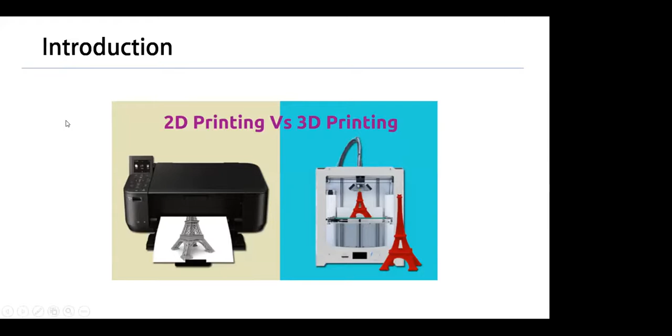So you might have heard about 2D printing. Normally we use printers for printing any paper or question paper. So what is it basically? It's a 2D paper on which ink gets printed. There are many printers, like laser jet printers and inkjet printers.

In a similar way, if we compare 3D printing, we are adding one more dimension, and that dimension is thickness. For example, if you take a single sheet, it will have length and width, but there is no thickness, only a very minute thickness. But if you stack about 100 pages, then you get one thickness. That is basically the third dimension we are talking about, and that is called 3D printing.

In a 2D printer, you can print just a picture of the Eiffel Tower, whereas with the help of a 3D printer, you can create a real 3D model of that Eiffel Tower.

So it's basically a layered process. Whatever the object might be, it will be split into different layers, and one by one the layers get deposited. In manufacturing terms, this is called additive manufacturing, because we are adding layer by layer to create the final geometry, and it is in contrast to conventional manufacturing.

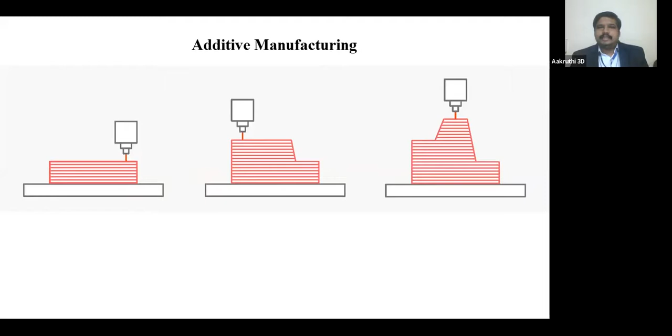There are many other names for this technology. In the 1990s, people used to call it automated fabrication. There's one popular book also by this name, AutoFab. What it means is we are using automation to fabricate things—that's why it was called automated fabrication, or AutoFab.

Then it was called freeform fabrication. Freeform means it is free of complexity, or the independence of the form—that is called freeform fabrication. Since it is mostly used for prototyping and reduces development time, it was also called rapid prototyping.

And stereolithography—this word was coined by Charles Hull. He is basically the inventor of this technology, and he invented it during 1986. He founded a company by the name 3D Systems, which was the first company to come up with this SLA 3D printing technology.

Lithography—you might have heard this term in the electronic semiconductor industry. It's a Greek word: litho means stone, and graphia means writing. So literally, lithography means writing on stone. Earlier, artists used to do this—if they wanted to make drawings on stone, they used this process. It's basically a chemical process.

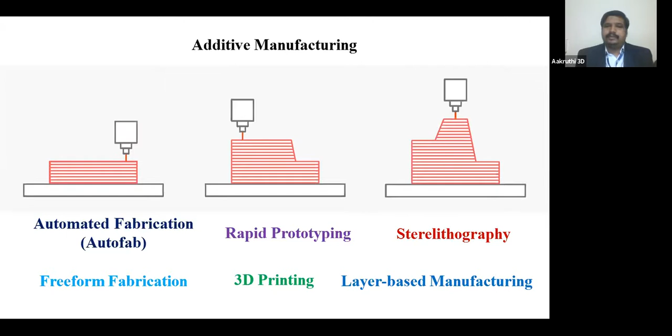Stereolithography is one process in which we use photopolymers, which we'll see in a short while. And as I told you, it's a layered process, so it can also be called layer-based manufacturing. The term 3D printing is the most popular word—researchers at MIT used to use this word because inkjet 3D printing technology was invented by researchers at MIT. They thought since we are just adding one dimension, this would be an appropriate term, and it makes sense as well. That's why this word became popular.

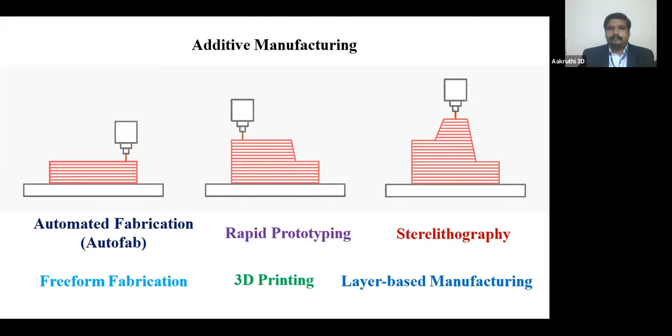Now coming to how the technology works—these are the brief steps. Everything starts with an idea. If you want to build something, you have an idea, then you convert it into a digital design. Since most of you are engineering students, you might be aware of CAD tools like CATIA and SolidWorks. You use that CAD tool to create the digital design of your product, and then feed it into the machine. But you cannot feed the direct CAD file to the machine, because as I told you, it's a layered process.

We need to convert whatever design you have into various layers. That process is called slicing. We have many open source slicing softwares, and there are proprietary softwares also, where the main objective is to convert your digital design into this layered format.

Then that will be converted into one more file format called STL, or stereolithography format, that can be readable by a 3D printer. You might know what language a computer understands - it's binary language. Similarly, a 3D printer understands a language known as G code or geometric code. So what this slicing software does is convert your STL files into G codes.

Then you feed whatever material you need. That material will actually be deposited in layers to create the final object. You can remove that object by hand, or there are some systems which have automated this process. Then we can do basic post-processing techniques to obtain whatever qualities you want, like maximum surface finish or strength. All these qualities we can bring to the model using post-processing techniques.

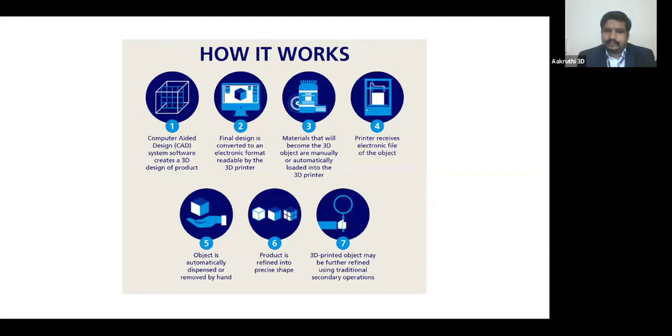But with 3D printing, all these complexities - it is free of that.

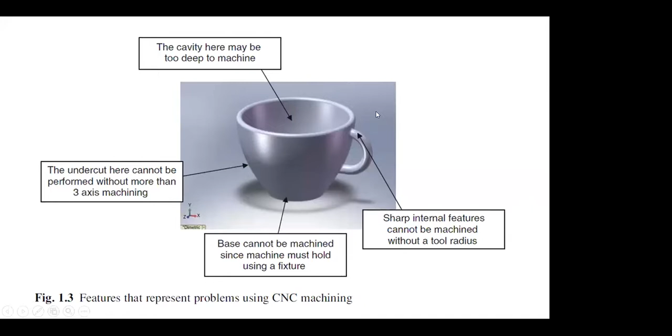Coming to the plastic regime, there are 2 major technologies: one is FDM or fused deposition modeling, and the next one is SLA or stereolithography 3D printing. So today in our webinar, we're going to focus on these 2 technologies - we'll compare FDM and SLA 3D printing.

Nowadays 3D printing is being applied to all fields. Recently, you might have seen Nirmala Sitharaman inaugurating India's first 3D printed house. Before that, even L&T ventured into a similar adventure - that is construction 3D printing. Similarly, 3D bioprinting is there, where you can use live cells and tissues to make human organs.

And there is wax you can print. Metal is actually the revolutionary part, where it is starting to be the next industrial revolution. Industry 4.0 is coming - we are already on the verge of it, where additive manufacturing will play a major driving force for it.

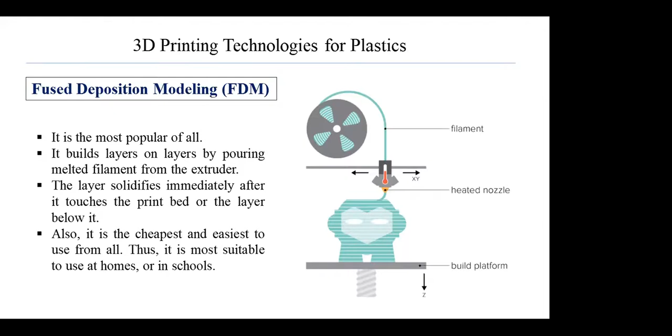But it has its disadvantages, like you might not obtain the surface finish as you require, and the materials are limited, so it cannot be used for all applications. Only for the initial proof of concepts or prototyping can you use this technology. And there are many commercial brands available for FDM 3D printers.

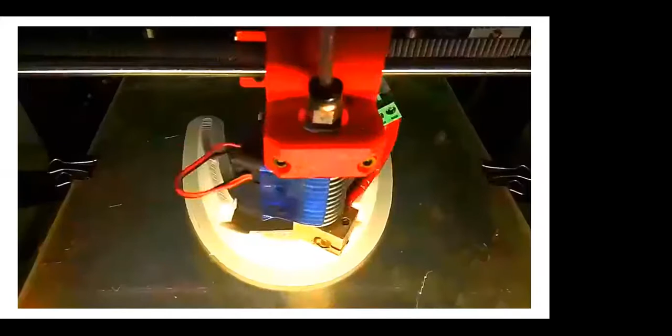So here you can see there is a pattern in that model. That is called infill. Normally using conventional manufacturing, either you can create complete solid models or hollow models. But this is one aspect of 3D printing which is a great differentiator: you can make semi-solids, that is, inside the material you can give some patterns so that whatever strength you require, it will be there.

But at the same time, it will reduce the weight. So this type of application, like in aerospace, will play a very predominant role, where weight reduction is important, but your strength should remain the same.

Then coming to the core of today's focus, that is SLA, or stereolithography process. As earlier I was explaining, FDM is a mechanical process using thermoplastic materials with a heating component. But SLA, in contrast to that, is a chemical process.

So it comes under a classification called VAT photopolymerization, or it is commonly known as resin 3D printing. In this, there will be a photopolymer or a resin that, when it comes into contact with the laser light or a certain wavelength of light, will react to form a hardened plastic. So it is called curing basically. The laser cures photopolymer resin in this technology.

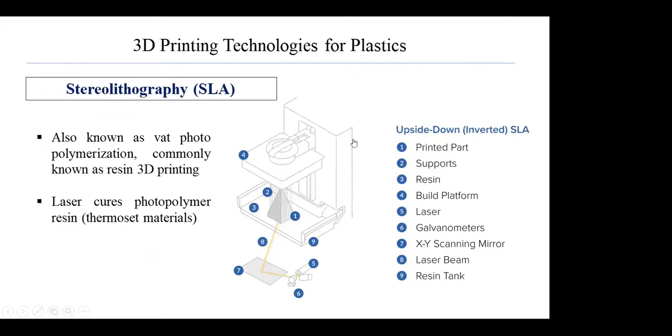In this process, the build platform as well as the part first lowers into the liquid resin.

This process goes on repeating layer by layer. The build platform lifts out of the liquid resin, then lowers down again. Like this, layer by layer, it happens. Through this, the heavy forces are reduced, and we can obtain better prints and better surface finish using this technology.

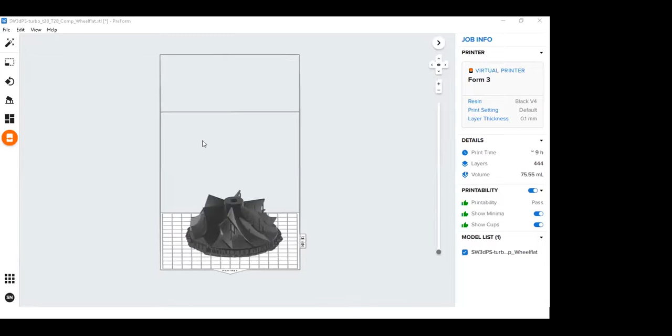So this is the software, it is PreForm. The first thing is you need to load your models, and the preferable file format is STL or OBJ. Here you can see the impeller - I'm just using it for demonstration purposes.

On the left side, you can see some options. The first thing is size, so you can scale this component - you can increase or decrease the size according to your requirement. And you can generate supports using this.

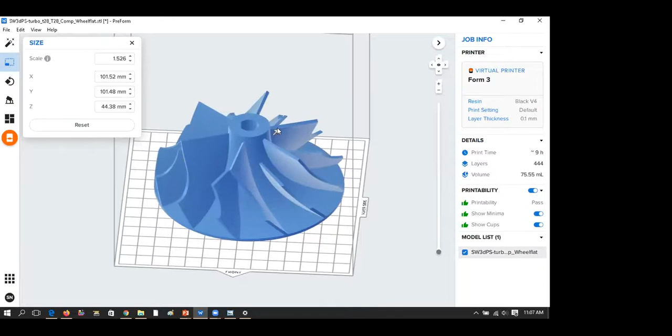So you have to select this component. Here you can see I've used a scaling factor of 1.5, or you can directly drag and drop so that component becomes whatever factor you want, you can make that size.

On the right side, the main important parameters you can see - what is the resin we are using. Currently it's the black V4 resin, and the default print settings are set, with layer thickness at 0.1 mm, that is 100 micron layer thickness.

Here you can see the print time taken for the model, how many layers it's going to print, and what is the volume of resin it's going to consume - it is 80 ml resin it is consuming. And for printability, you can see here it is giving a warning.

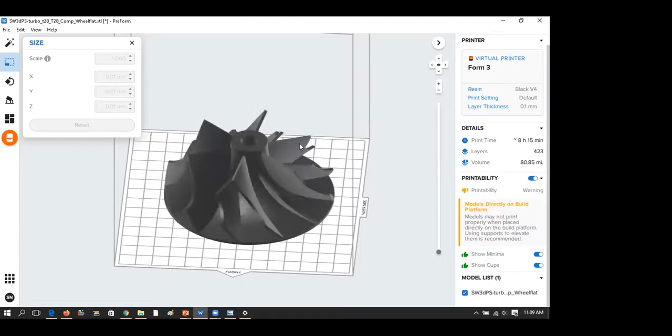The model is directly placed on the build platform, so we cannot print it like this as it is, because as you can see the blade profile, we actually need support structures here. So let me show how to generate support structures.

Again, you have to select the model before applying any setting. Then on the left side, you can see the second icon, that is for orientation - if you want to change the print orientation, you can do that. The third one is for supports.

There are different types of supports. Basically, where you want to generate a support is very important, because here your blade profile is important - there you need very high surface finish, that's the place you don't want support. But there is an auto generate option also - let me just give it and see.

So these are basically supports, extra materials where there is overhanging, support structures will be generated that we'll have to remove in post-processing stage. Our main aim is to get printability pass. On the right hand side, you can see it is still in warning. Once we get the printability pass, then only can we go ahead for the print.

Right now I'm using a virtual printer. You can directly connect through USB to your real printer, or there is one more option called remote printing, where right now our machine is in Bangalore and I am sitting in Shimoga. So I can take control of the machine, give print from here itself, and monitor its progress - what is happening, whether the print is going as scheduled or not. Those parameters I can monitor, or if I want to stop it, I can do that. So that option is also available in this machine.

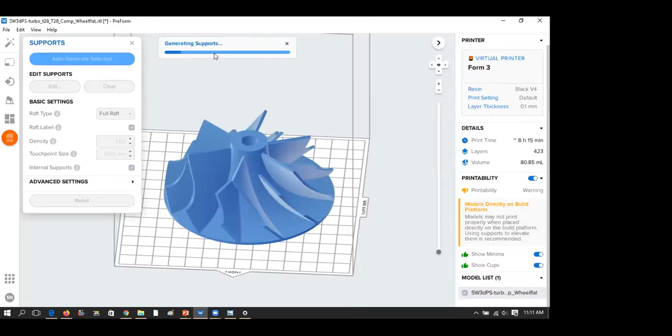So you can see the supports it is generating right now. This is going to take some time. In that meantime, we'll try to see the printer properties.

Supports are generated, you can see here. The main difference is here you can see it is not continuous support - there are spikes like structures. And it is very easy to remove these structures, just manually we can remove it.

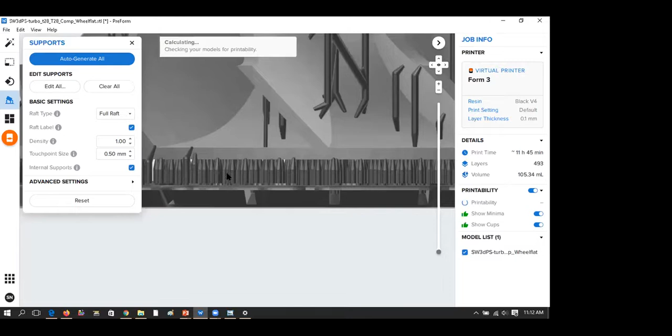And here you can see the raft type given is full raft, that is for the entire model. There will be a support structure generated, its density, and touch point size. Touch point size is each of these spikes actually - it will be in contact with the model. So what is that size? That is 0.5 mm.

And now you can see on the right side, the printability is pass. Just look over the entire model, how it is generated.

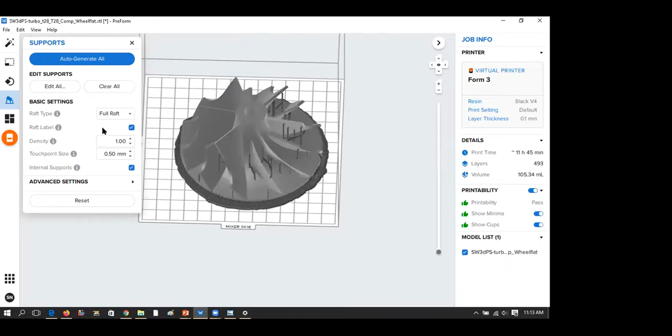But here actually, you can see it has generated support. So this we don't want. So what we can do is, there is one more option - you can change this orientation so that we can avoid supports at these structures.

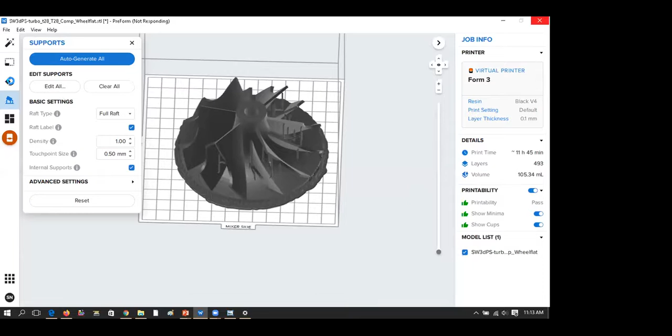This software's minimum RAM supported is 4 GB and above, so the recommended RAM is actually 8 GB - that's why it is hanging, you can see here. Otherwise, we can change the orientation of this model so that wherever the blade surface is there, we can avoid those support structures.

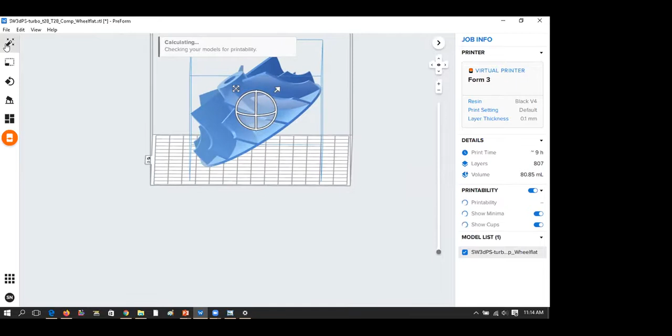We can use this orientation, or there is one more option called one-click print, where the system itself will automatically orient so that it will avoid these supports at those specific places. Let's see - this is the best orientation calculated by the software, and here it will generate the support.

Our main focus is on the blades. For the base, however much support is there, we can do post-processing to make a smooth surface finish.

So this is how you do print preparation using PreForm. Once that model is ready and printability is passed, you can directly upload the job to your machine, which will have a default memory of up to 64 GB. So you can directly send this model to the machine and it will start printing. Right now it is taking some time to generate support.

In that meantime, we'll go to Lohith. He can give a demo of how the machine looks like, and you can see in real how the resin tank looks, how the build platform will be there. Then we'll come back to the same location and see how the supports have been generated.

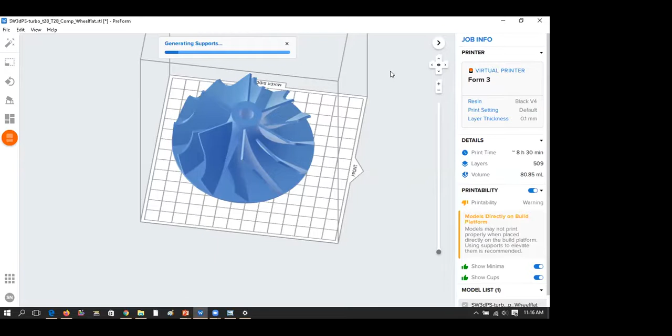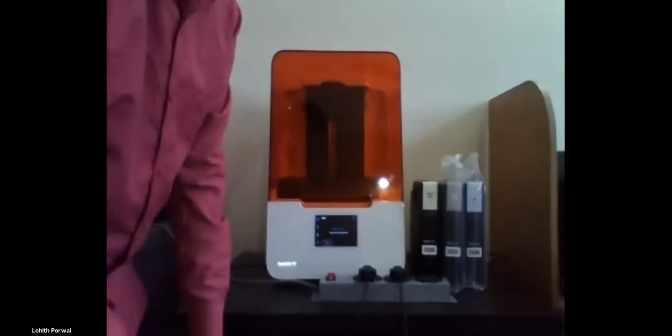Lohith? Yes, Raghavendra. Shall we start? Yeah. Is my screen visible? Yeah.

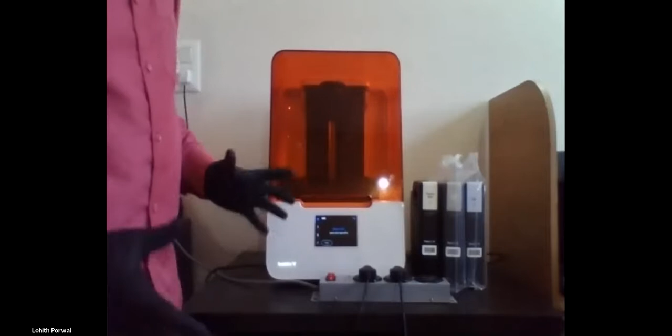This is the machine which has a covering protecting it from UV light as well as sun rays to avoid solidification of the liquid resin. This is the touch screen display where we can set our conditions. The first one is the home condition where our machine is ready to print, so it's asking the user to upload a job where we can see how the job is going to look like.

Previously we had uploaded many jobs on this particular machine, so the data is stored in the queue option. If I do a touch screen, I can see there are many different jobs available to us, and whichever part I want, I can reprint it without even asking the sender to send the model again.

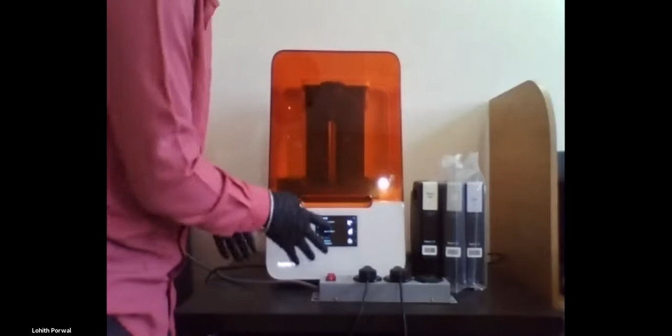So I can reconnect and reprint it to avoid those type of issues, especially due to unavailability of the user, since we already have the data stored here. I'll be selecting the same impeller model which Raghavendra was showing you. I'll click on this particular impeller, and now we can see approximately the same information being displayed over here as Mr. Raghavendra was saying.

The printing time is going to be 6 hours and 7 minutes. The material information is given, like which resin we are going to use, how many layers are going to get printed, and who was the creator of this particular model. So that information is available, and if we click on print, the machine will start printing, which I'll show in a few minutes.

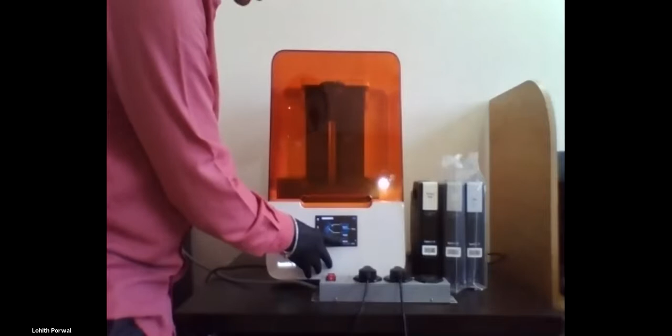After that, we have different notifications to see if our machine is working right or not. For example, we can check if the resin tank is placed, and if it is placed, what is the material in it or which liquid resin we are using. That information is given by the display screen.

After that we have a base plate, which is the print plate. If the print plate is placed in position, it will give a correct symbol. If it is not, it will give an error message, which I'll show how we can rectify.

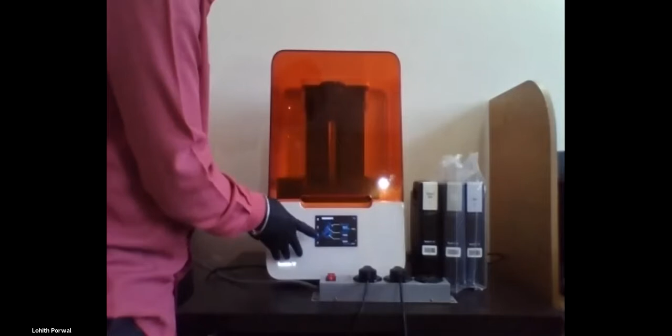Then we have a cartridge over here, and you can see there are 3 different cartridges available. These are the resin containers where resins are kept. We have elastic tough resin as well as clear resin. Currently we have 3 displayed here, and 1 more resin is placed at the back side, which I'll show.

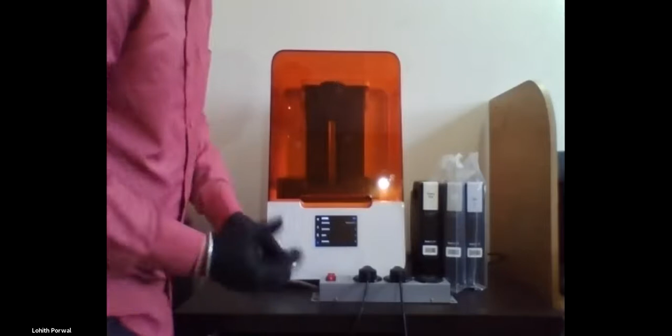As Mr. Raghavendra was telling, it has Wi-Fi connectivity so you can use this system from a remote place also. We have the connectivity information, the IP address of the system, and different issues, troubleshooting, and maintenance information all pop up on the system.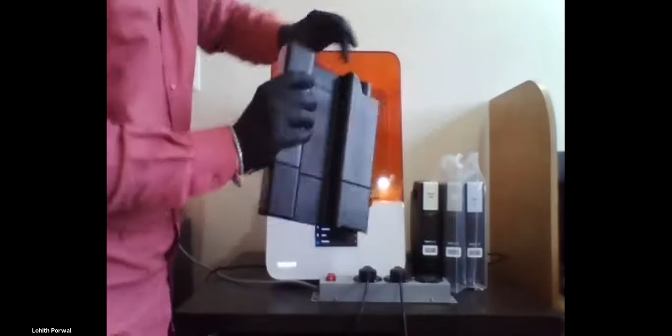So coming to the parts of this particular machine, first I'll show you the resin cartridge. I am removing this particular cartridge from the back portion. Here we can see it is named clear resin, with an information code and different details given regarding this component. I'll be inserting this resin back at the back portion like this.

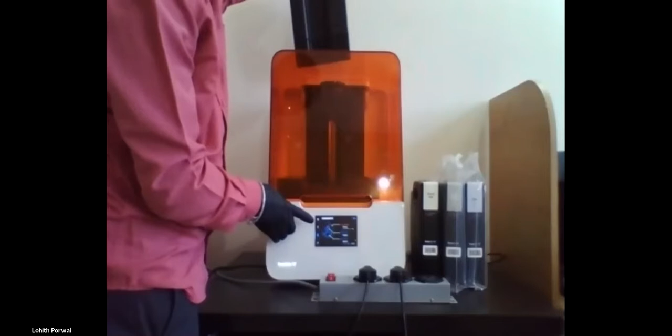To check if the resin is inserted correctly, you can see there is a red color being displayed, indicating the resin cartridge is missing. Once I place this particular resin cartridge, it turns blue, which means the resin is inserted and functioning right.

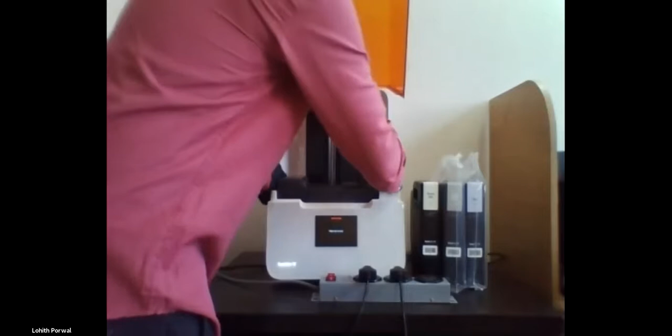Next, after inserting this cartridge, I'll open this particular container or shield. Now here we have this resin tank, which I'll be removing for display. It's a bit visible, can you all see the liquid resin inside this? Is it visible?

Yes. Can anybody confirm me? Yes sir, yes sir, visible sir. Yeah, you can see. And this is the main USP when compared to other machines.

We have a flexible resin tank here, where the base is not fixed, it is a flexible one. That is what is different in LFS compared to normal SLA technology. Yes, Lohith, you can continue.

After removing the resin tank, we'll again be inserting it back. Once the lid is open, we can see an error message on the screen saying the cover is open. To avoid that, we'll insert this properly, and the information says the resin tank is stored. When I close it, everything turns blue in color.

That means the resin tank is also inserted properly. There is no error in the resin tank insertion.

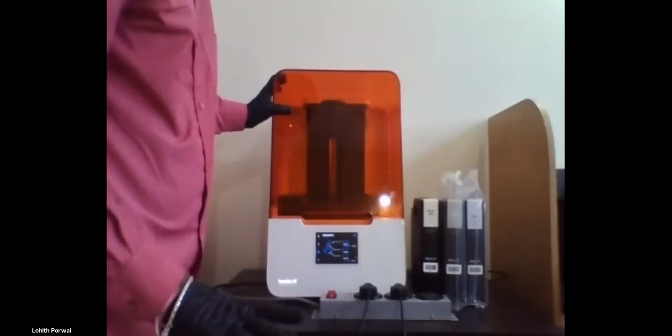After this is called the build platform, which I'll be removing now. I'll slide this down, and we have this component called the build platform. Whatever component or CAD is loaded will be placed over here.

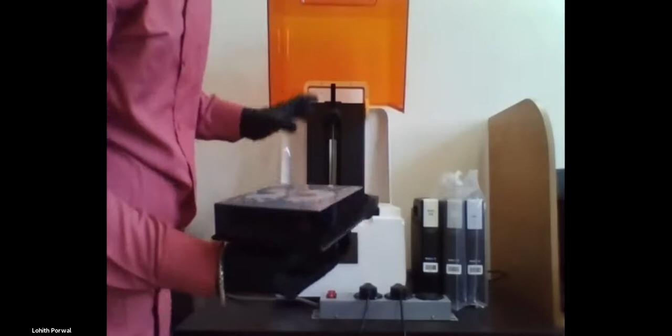For example, I have a few ready CADs which we have printed. The same impeller model is ready with us. We kept this model on the build platform, then did the post processing, and then removed this component.

I'll show what different components we printed. This is the build platform, and on this the resin is going to be impinging, meaning the low force is going to act. This rod is going to move up and down to move the build platform, and the laser is used to solidify that resin.

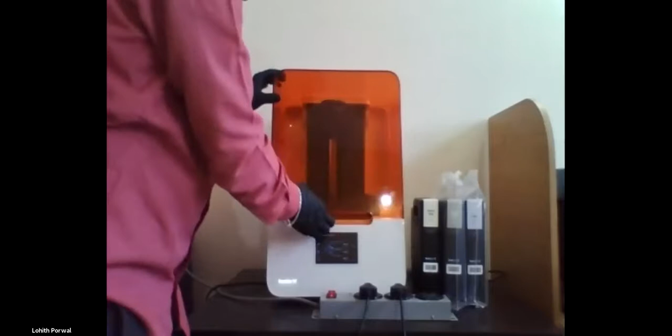I'll reinsert this build platform over here. After reinserting, we have this knob which I'll press down so that it is in proper position and locked, so it does not move. After that, I'll close this tank and check that the platform is correctly fixed or not.

Now I'll go to the machine and click on the impeller model. After this, everything is checked. We also need to check that the container, the box container, that is the cartridge, should first be opened one time.

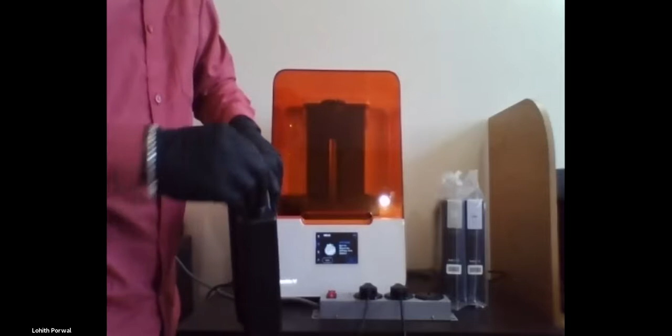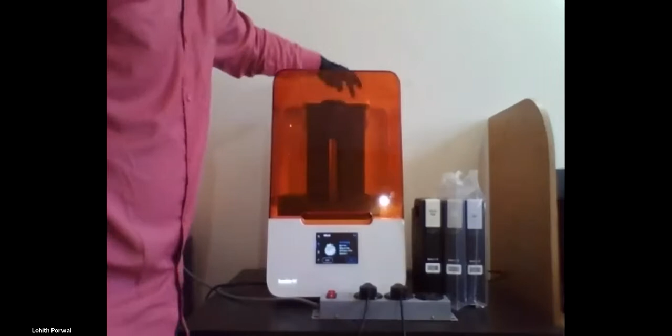It should be exposed to a bit of air, where the air passing will not create blocking of the flow of the resin. So we need to open the resin by opening the cap of the cartridge, and then make sure that all the steps we have followed are right.

After that, we'll click on this print option. When I do that, it gives a step-by-step procedure. It tells me to open the vent cap, which is of the cartridge, and make sure it's placed correctly. After that I click on next.

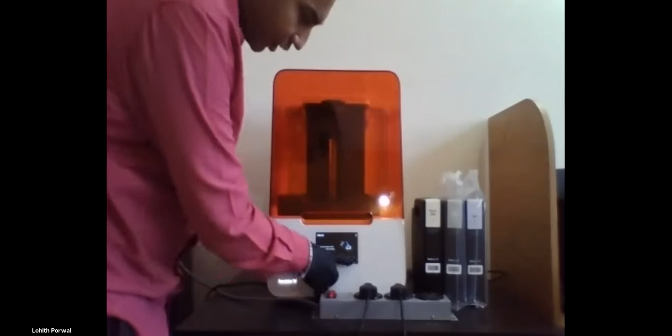Next, it tells that the build platform is locked; if it's not locked, please lock it before printing starts. So it's giving step-by-step instructions which I have already followed. Once I click confirm, it shows preparing print and is checking the optics.

There are 5 different steps which it is going to follow. The first step is optics. The second one is preparing the printer to check the resin.

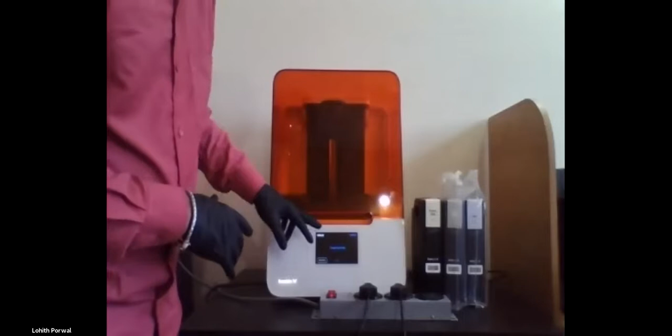Inside the resin tank, there is a movable film which moves to see how much resin is there. Based on the amount of resin present in the tank, resin is poured from the machine, and the liquid comes into the system and fills the resin tank needed for printing.

Now you can see it shows filling tank with clear resin. It's actually filling the resin tank, and I can see thin layers of resin flowing into the system and getting collected.

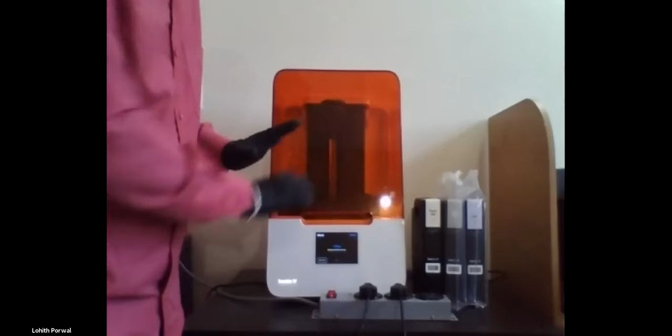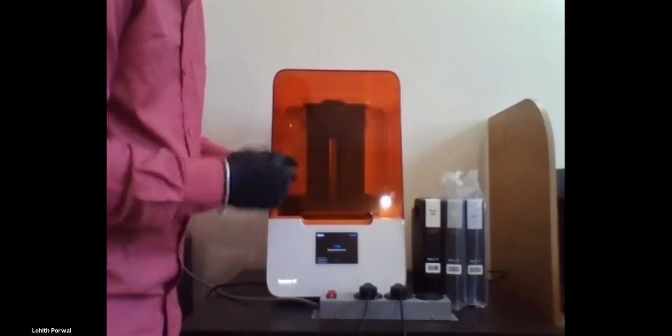Once this step is completed, it will check all the other settings to see that everything is right. Then it will show the printing status, talk about the time it will take, show a green mark or a circular pattern indicating how much time remains, how many layers have been printed, how many are pending, and the estimated completion time. All this information is shown on the display.

Now we have different materials as told, elastic, which is usually used for applications related to biomedical. For example, we have completed 3 different products which I am showing you today.

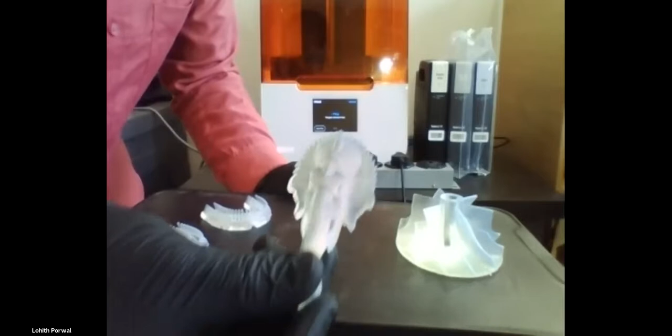Before that, we have this Ganesha model prepared to see how the complex features have been captured by the machine, and how much detailing is done on this part can also be visualized. After that, these are the strong materials.

So if I press like this, it's not going to bend. I'm pressing and it's not bending. This is from the tough material, because it's strong enough. So based on the application, we select the material.

But when you come to this particular model we've printed, it's related to an automatic brush system we are developing. If I press it, you can see how flexible the material is. It's mainly used in the bio industry or biomedicals, where the strength and features need to be captured.

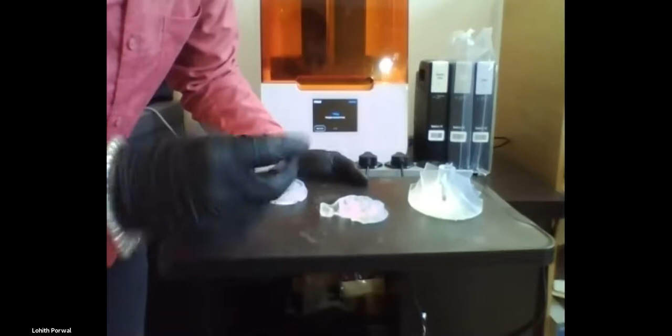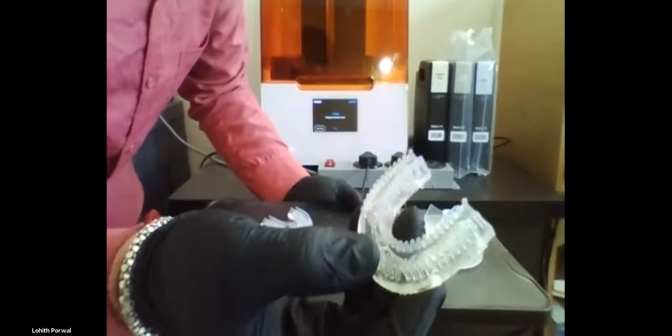So you can see we have two brush-type features over here, like bristles. If I press the bristles, it's going to bend. That shows how much detailing has been captured and what different features can be implemented, based on the design and the printing capability our machine is capable of.

So currently we are seeing that it's filling the tank. We'll have to wait for some time till the process starts, so I can show what the process is and how it's going to start the machine.

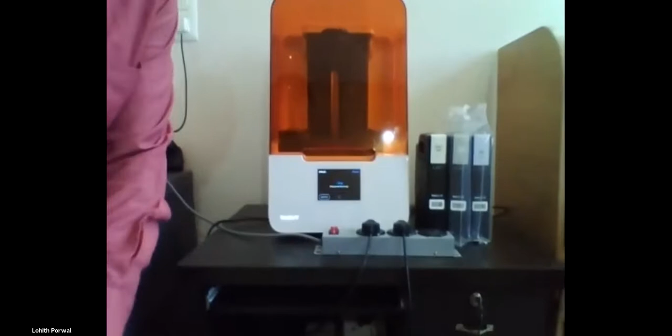Yes, thank you, Lohith. So let it print actually, it will take some time for printing. Meanwhile, let's see what has happened to our support, and then we'll look at some post-processing operations. Lohith, you can prepare for demonstrating post-processing in the meanwhile, and then we'll go back to the post-processing demo. I'll just share my screen.

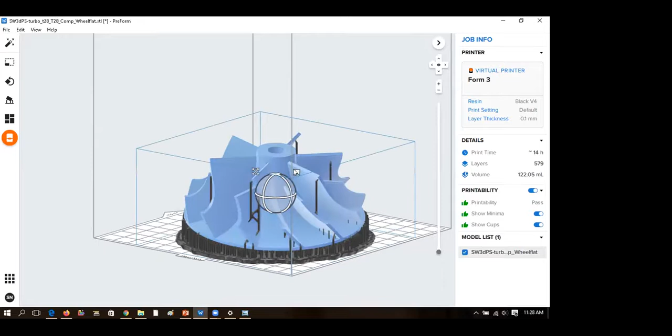So now here you can see the machine and the orientation it gave. Now there are very minimum supports. I agree there are some supports where this blade structure is, but compared to the previous one, it is better now. There's just one spike, you can see, that's all, and even that we can remove manually. So this is the best orientation according to the machine.

Once this is done, then we can give the print. You can see in the left hand corner there's an orange button, that's the start print. If I press that, and if connection is there with the printer, the printing will start. Otherwise, through remote printing, there's a dedicated account, and through that we can give the print.

So now we'll go back to our presentation. This is how we use PreForm, and then you give the printing. Once printing is done, we'll have to do a basic post-processing operation. In SLA, these two are mandatory processes: washing and curing. For these two, Formlabs has made it very easy with two machines.

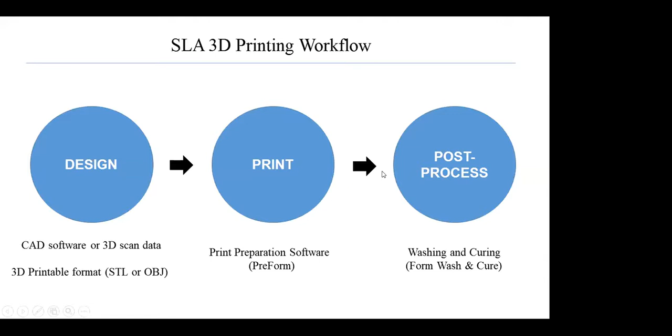Basically you can call these form wash and form cure. With the help of this, we can easily do the post processing. So what is the post processing? Here you can see on the left side, these two I was talking about: one is form wash and the other is form cure.

Once the print is completed, your parts need to be rinsed in isopropyl alcohol solution. Why is this done? The process, as I already explained, is photopolymerization - the laser cures the resin. But there will be some resin that is not cured, maybe due to geometric complexity or due to supports. There will be some uncured resin, so to remove this uncured resin from the surface, we use IPA solution and rinse the components after printing.

Once this is done, then we want to do post curing. What is this post curing? It's basically a heat treatment process where, based on different materials, we give the suitable temperature and time for post curing, so that you get the required strength for the component.

Once these two processes are done, we can finally remove the supports, and all other operations can be done, like sanding, machining, painting, buffing. So all these different post-processing techniques are there, and can be done on this part. SLA parts can be easily machined, primed, painted, and assembled for specific applications or finishes. So this is the post-processing aspect of it.

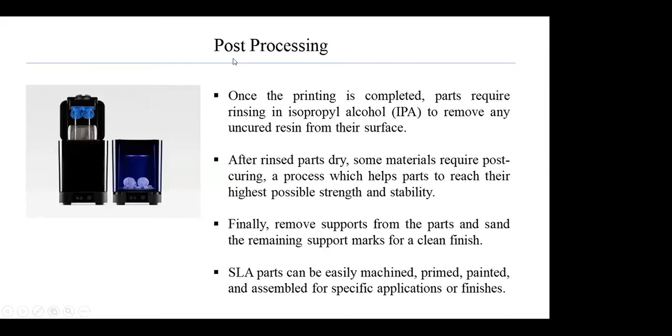Now let's have the demo of this post-processing. Lohith, go ahead. Yes sir, I'm just switching on my video. Is my screen visible? Yes.

Here on the build plate, we have this component which is already printed. We'll be using this washing container to wash the component using isopropyl alcohol, and we'll be using this heat treatment process to give strength to the component. We have different tools here which we'll be using.

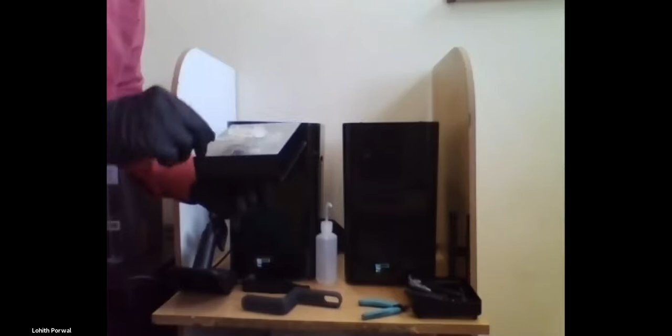The first one is the picker tool, which we'll use to lift this part. For example, since there are no supports, which I've already placed here, I'll be using this component by hand and placing it in this system.

After that, we have different tools, but sometimes the parts are so complex that we cannot hold the build platform in hand and use it. So we have this stand, given by Formlabs. We'll slide this build platform onto this system, and once sliding it, we can see it has a grip support.

Once this support is there, we'll place it like this on the table, and then use these tools to remove the supports, to break them off.

We also have different types of cutters available. We'll use these cutters to cut the supports where we saw in the software that additional supports were generated on the impeller blade if we did not give it auto orientation. In that case, we'll use this cutter to remove those supports.

After removing those supports, now we'll use this washing system. I'll click on start, and set the amount of time required for washing. That information I'll provide, and based on that the system will run the washing.

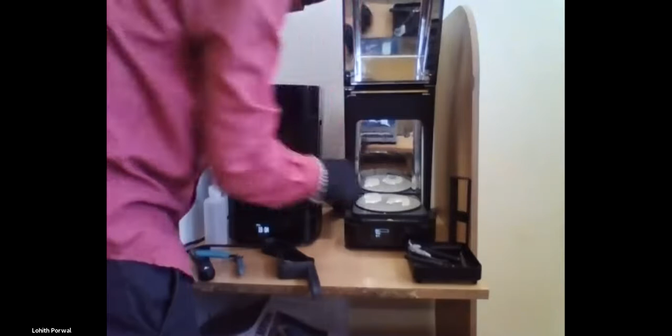After the cleaning is done, we'll use this system for heat treatment, where I've already placed the printed components inside. As you can see, I have two components placed here. I'll be keeping them on this circular plate or bed where the heat will be emitted, then closing the entire system and setting the timing.

I have to set the degrees for heat treatment. For example, if I click on 60 minutes and rotate the knob, I'm able to change the timing. For this one, it's already heat treated, but if I do more, it'll become more solid. So I'll keep it for 2 minutes at 60 degrees Celsius, and if I click start, it will begin heating. The required temperature is 60 degrees, but the room temperature is around 27 degrees Celsius.

Based on that, the required temperature is being raised into the system, and after that we'll be able to see the beautiful image of the component with the revolution shown over here. I'll move the screen a bit closer to the system so you'll be able to see the image of how the model is going to be.

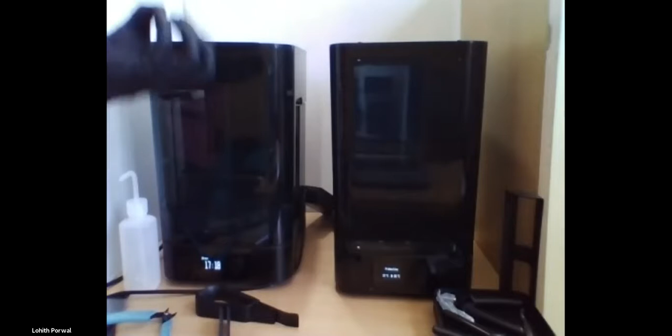It's almost 35 degrees Celsius, increasing to 60 degrees. Let's wait for another 2 minutes, then we'll see how the image appears on this screen. It's actually a mirror where the internal component, how it's rotating, the color effects and everything can be seen on this image. Let's wait a few minutes.

Meanwhile, Lohith, we can show the finish kit, right? Some of the tools we use for finishing. Okay, I'll do that.

We get different components in our finish kits, so I'll show them one by one. The first one is this suction pump, used to fill or remove liquid from this tank. If I press this, the liquid gets pumped in and out, based on the application. If you want to pump in, we usually use a can and keep this pipe in the system. By pressing this, it sucks the liquid from the tank and fills this washer container. So this is the pump we use.

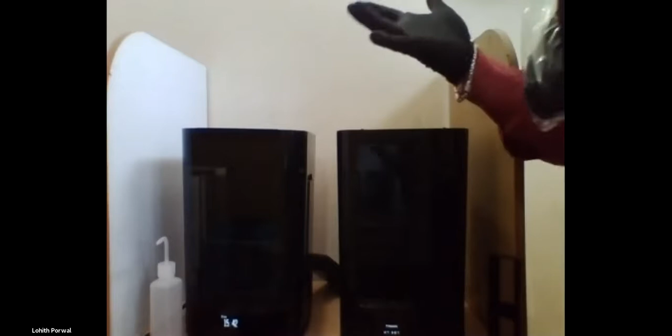After that, we have a flat plate where we keep the components. We get this type of container, where we store our gloves, tool kits, and everything else that comes with the kit. Once I open the container, we get a set of gloves which have to be used whenever we're printing or removing components from the printer. Since the resins are so sticky and might be allergic to the skin, utmost care has to be taken when removing this component.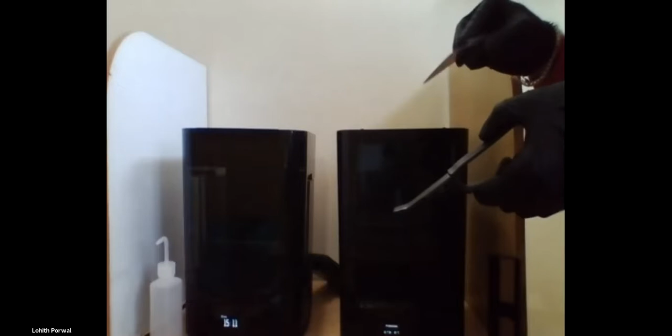After that, we have this plucker. There are different types of pluckers given to us. If a component is like this and I want to pluck it, or if I need to apply some force, I can use this component. If a component is very flat and I want to remove it, I use this flat base peeler, inserting it and removing it like we remove dosa from a pan. It's similar, but used for this particular application.

Then we have this cutter system, and we get 2 cutters along with it. Then we have a sort of picker, which is like forceps used mainly in the medical industry. If some application requires this type of forceps, then yes we have it in the system. We also have this holding tray or holding system. What it does is we can insert the component into it, hold it, and remove our system from this, based on the equipment, for holding the component without using your hands directly.

I think we have almost attained 50 degrees Celsius over here. In the meantime, let me remove this so we'll be able to see a clear image.

So Lohit, since we have limited time, I'll just continue the presentation. You just let me know when it starts. We'll see the thing.

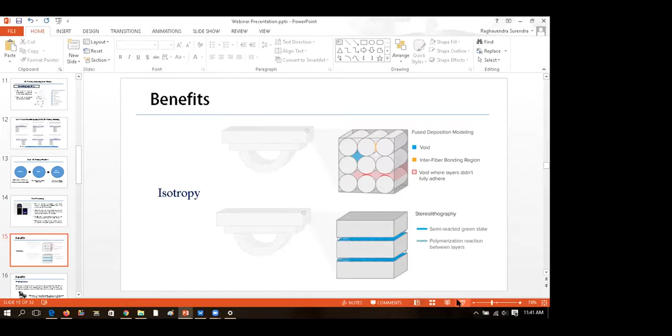So we just saw the demo of the 3D printer and the post-processing operation involved with that, that is form wash and form cure. Now let's quickly go through what are the benefits of SLA 3D printing.

So the main thing is actually isotropy. With SLA, you can obtain highly isotropic parts. Whereas in FDM, since it happens in a layer by layer fashion, the mechanical properties will be different in different directions, in XYZ directions. But with SLA, you can obtain highly isotropic parts. So why is that difference?

You can see in the image here. Different filament strands are getting deposited, and they are really not bonding. So in FDM, there are some visible voids you can see, and there are some interfiber bonding regions and voids where layers didn't fully adhere. This is the reason FDM parts are anisotropic, whereas in SLA, it will be in a semi-reacted green state, and there will be covalent bond formation, so that your entire model is continuous. There won't be porosity in this. That is why these are isotropic parts we can produce using this technology.

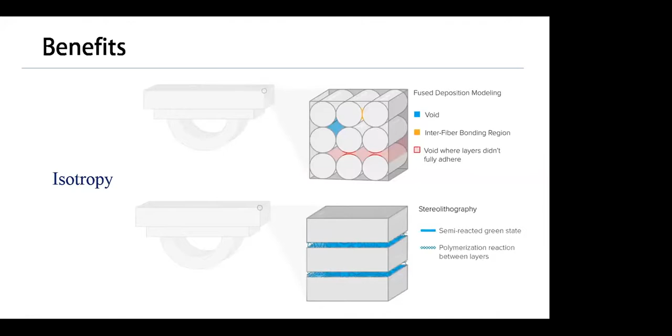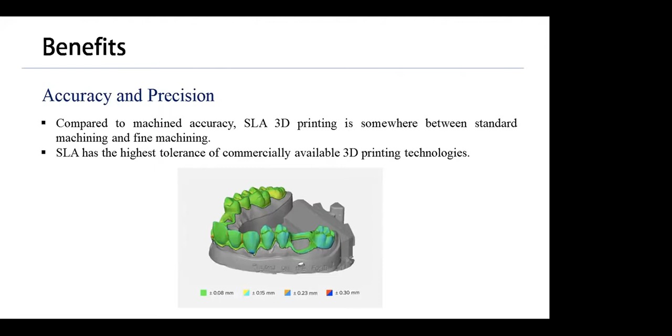And compared to all other commercially available 3D printing technologies, SLA has the highest tolerance. In FDM, normally 100 micron is used for very fine prints, but here up to 25 micron we can obtain.

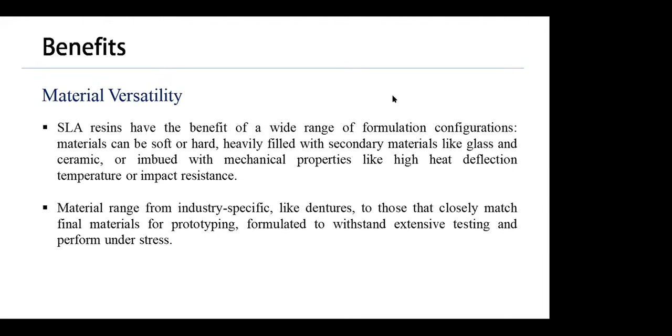And the next very important benefit is material versatility. You have a wide range of materials for your application. We have some resins specific to dental, some for engineering, and some for general applications as well. If you want soft or hard material, we can choose. If you want to insert some secondary materials into that and make a composite, that also we can do. This ranges from application to application. I'll just show some of the materials.

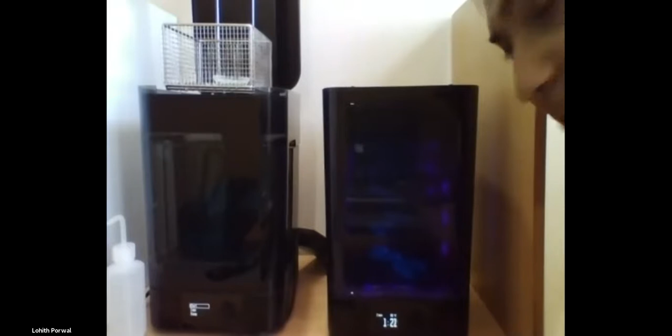For example, this particular part is printed and I am just taking this using the gloves in my hand. So I will be pausing this particular system over here, and I will be keeping this particular part in this equipment over here. Once I do that, I am keeping this over here, and I will close this system. It will automatically resume, and now it is showing that the system is working.

I believe that this purple color screen is visible over here. Is it visible? Yes, Lohit, it's visible, very much.

So here the parts are moving and getting heated up, and based on that, the toughness of the material and how flexible we want it is determined. It's a flexible material, but based on the heat treatment, the toughness also gets introduced. Keeping that in mind, we have some standards for biomedical applications, where if you're using an elastic material, there are defined temperatures and durations for heating. Based on that information, we usually set this system and do the post processing of the entire model which we have printed.

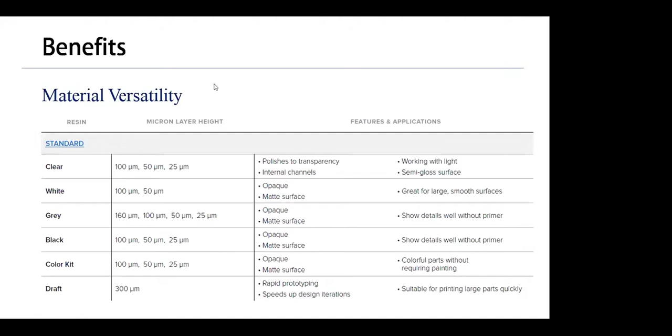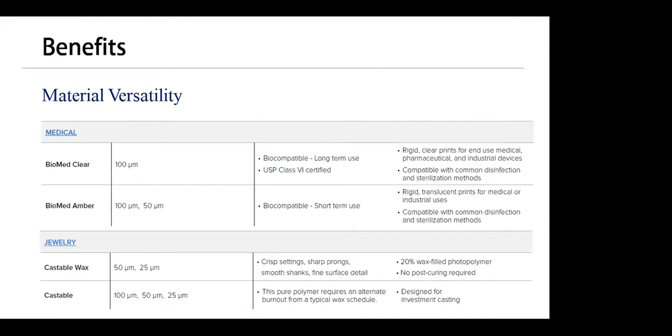Coming to cost analysis, here I have compared 3 different technologies: hobbyist FDM, the very preliminary consumer FDM printer; desktop, like what we saw with Form 3 or Form 3B; and industrial SLA. There is a difference between the first two - you can see it's almost 4 to 5 times costlier.

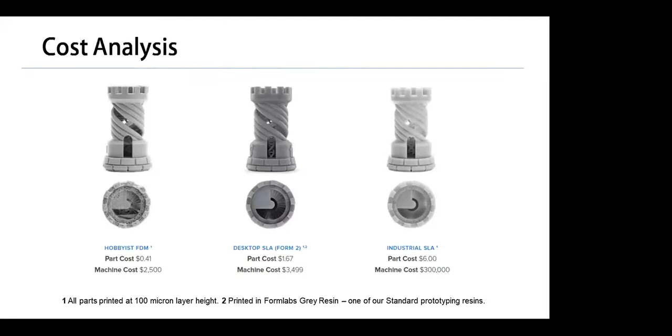But if you see the machine cost, just with an additional $1,000 you'll be able to get an industrial quality. So comparing industrial SLA with desktop SLA, you can see a huge margin between the machining cost as well as the part cost. This is just for reference, so if you want more specific details, you can get in touch with our team.

Coming to applications, it can be used in manufacturing for fabricating realistic proof of concept models and high fidelity prototypes. You can use this in engineering and product design, where custom tools and molds can be made. We are primarily working in Shimoga and Belgaum, where there are majority of foundries, and we are helping them with casting patterns and runner gating systems.

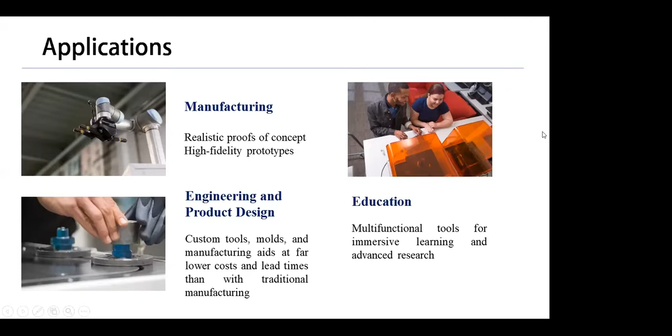In dental 3D printing, we can do cost-effective, mass customized digital production across a wide range of components. You can print crowns, bridges, temporary restorations, customized trays, casting patterns—whatever the application, a wide range is covered using this.

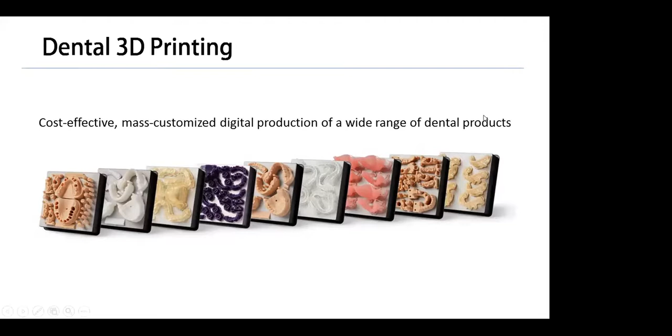With this, you can obtain fast and efficient production—whether a full build or batch production, that can also be done using the Form 3B series.

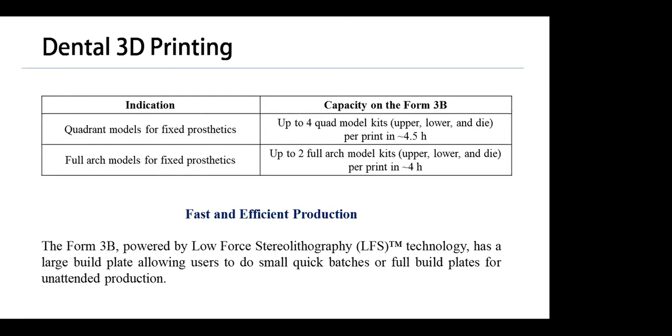With this, I think we have a time limitation. If there are some questions, we can take them now. Kirtan, if there are some questions, we can take them now.